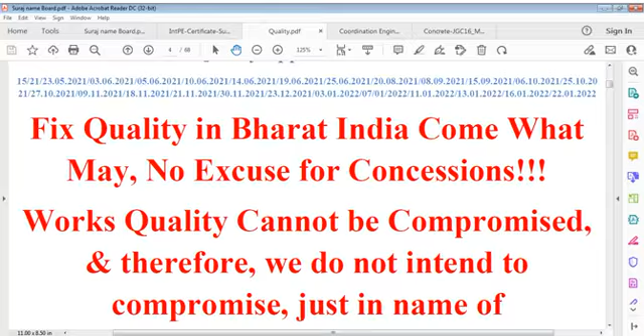For our country, Bharat, India, we have to agree and establish, and we should not believe in any concession. We have to think, do, and produce works. Quality cannot be compromised. If we compromise quality at all times, then we compromise engineering, because my product as a civil engineer has to live for 50 to 100 or 150 years, and products of other engineers cannot stay that long.

No machine can stay for more than 5 years perfectly, you can say 5 years, 10 years. No electronic gadget can work perfectly for more than 1, 2, or 3 years. You buy any electronic item, it shall not work perfectly after a couple of months or a couple of years, and that's the difference.

If you compare construction or civil engineering with other branches of engineering, we have to be very serious because we give a product for a whole life, a lifelong product, not just one lifetime but generations. You use this product, your son or daughter shall use it, and their sons or grandsons may use that project. That's why quality is very important from a construction or civil engineering viewpoint.

Not only in our country, but everywhere, though in our country it's most important because we generally use natural materials. In other countries I've seen adobe houses, wooden houses, plywood houses, or structural steel houses built on RCC foundations. Yet in our country we use RCC buildings, often combined with brick buildings, and that's very important where long-term effect is considered.

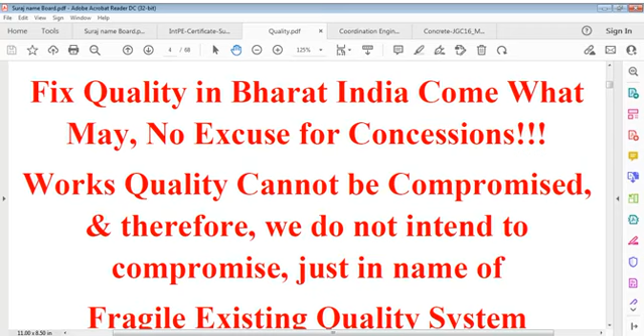Everybody decides that, but is that enough? If you say my company has been working in compliance with this system, is that enough? But you are not having any strict control on quality. If you don't have strict control on quality testing, checking, measurement and controls, you cannot say you are doing the right work. Okay, you satisfy the system, but you are not satisfying requirements.

That requirement is important. Compliance doesn't matter if quality is not achieved - I don't accept this fact. A quality system doesn't mean anything if your product doesn't conform to requirements or doesn't perform to intended quality. So quality should continue even if there exists no system. System may fail, but quality control must work. But it doesn't happen currently, to my experience.

Maybe your experience is different, maybe you don't want to realize this fact, but this is a fact. Take construction engineering, electronics engineering, mechanical engineering, whatever product available in the market - you shall be confused about this issue, that every product has some defect.

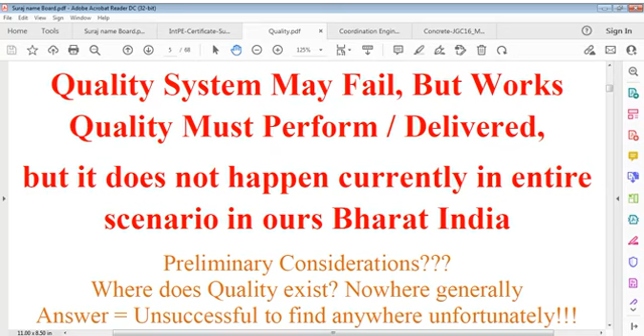Packaging is very good, talks are very good, every customer care unit talks very well - your call is very important for us. There can be questions on this. Only these fashionable designs of conversation have been made, but quality is not cared for. That's my real concern and preliminary consideration: where does quality exist? Nowhere - generally the answer is unsuccessful to find existence of quality anywhere, and that is unfortunate.

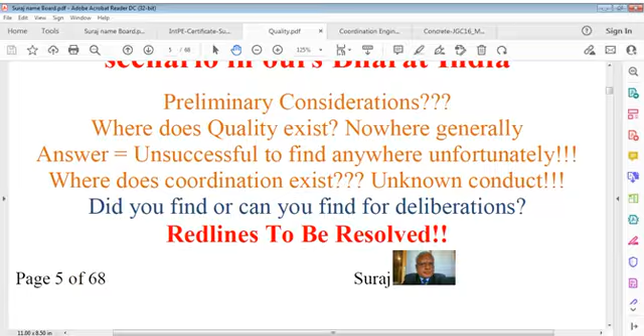Where does coordination exist? My answer is unknown - I cannot find it. Did you find it, or can you find it for deliberation? If you find it, let me know, we will discuss that. This red line we have to resolve. Can we bring the working environment to quality and coordination requirements? We have to get this point into our clarification.

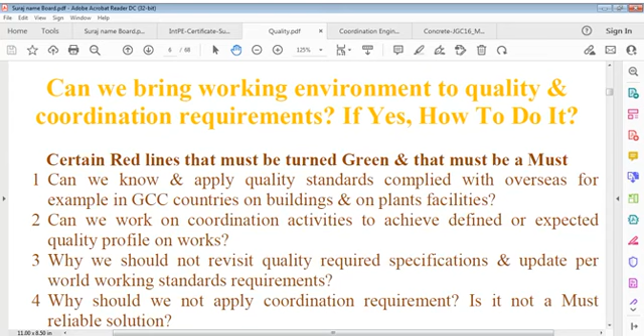Suppose I want to pour concrete but don't have information on what temperature I have to maintain, and I don't care for that. I don't try to find that information because I don't know how to coordinate. Who has time for this? Okay, fine, the weather is good, do it - and that point is done.

We don't care what's minimum, what's maximum temperature, what's curing temperature, what's concrete temperature, hardened concrete temperature, and what's temperature inside a block of concrete versus outside, what is the thermal gradient from time to time. All these points, part of technical and engineering coordination, are missed. We say okay, it's very solid, but maybe there are minor cracks we don't care for, but it should be careful.

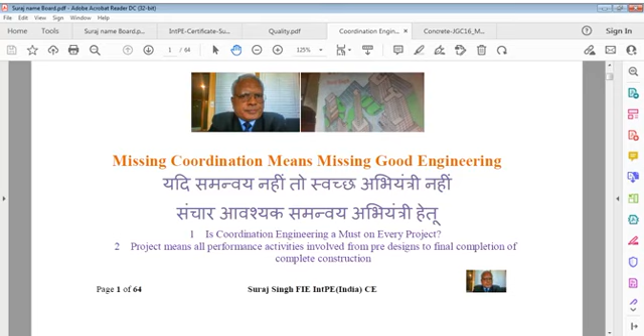Everything is not so easy as we think. We have to think from every angle, from every aspect - and that aspect is what we call communication support for reliability.

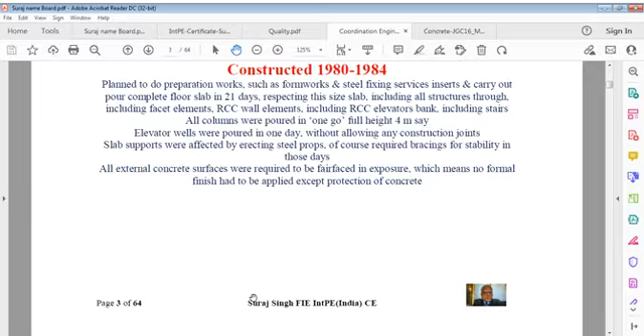Projects are not all the time such that you can say everything is fine, we have done it. We may say we have done it, but we did not do it, and that's the point where it's important.

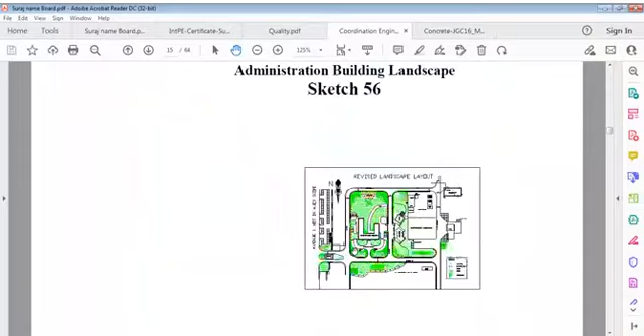I'm just going through my notes given on this card. That's why coordination engineering is a must on every project, and that is the point I refer to every time. This time also I want to spend some time on this coordination.

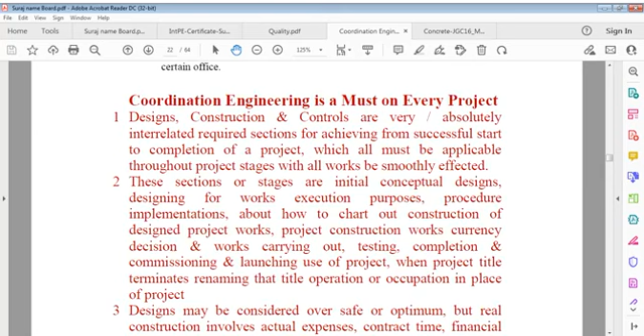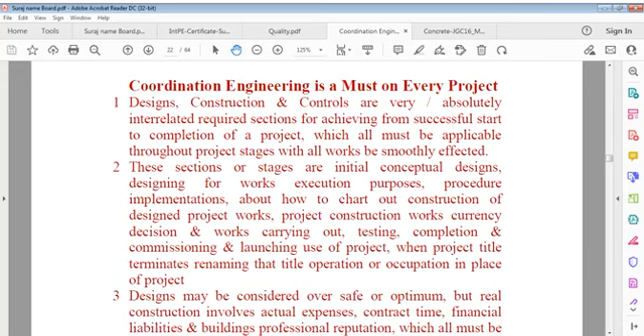Designs, constructions and controls are absolutely interrelated. Designs means what to construct, and construct means what controls we have on that, for achieving successful completion of a project, which must be applicable throughout project stages so all works are smoothly effected. These stages are initial conceptual design, designing for works execution, procedure implementation, how to chart out construction of designed project works, project construction works, currency decision and works carrying out, testing, completion and commissioning and launching use of the project.

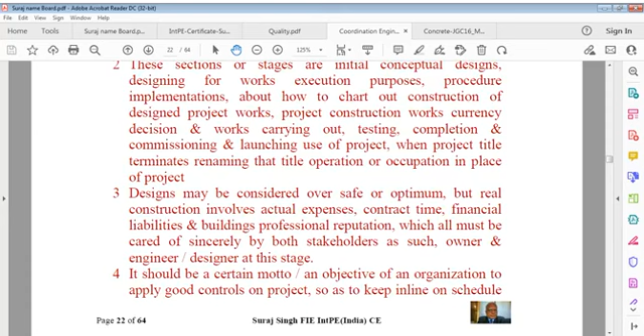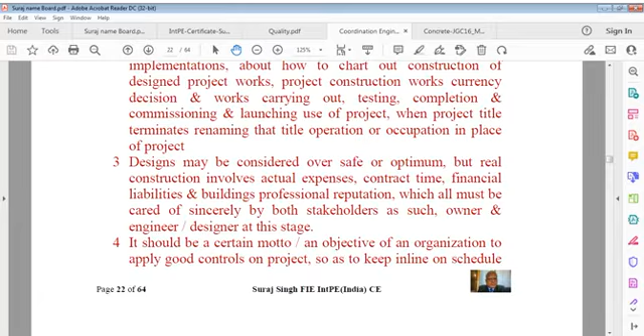When the project title terminates, renaming that title to operation or occupation of the project place. Designs may be considered oversafe or optimal, but real construction involves actual expenses, contract time, financial liabilities, and the building professional's reputation, which must all be cared for sincerely by both stakeholders, owner and engineer, at the time of design.

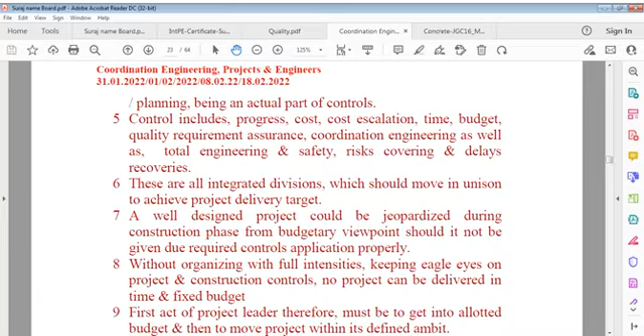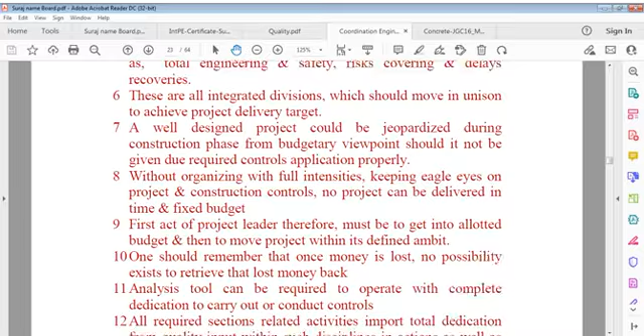A well-designed project could be jeopardized during construction itself, from a budgetary viewpoint, should it not be given due required controls application properly. Without organizing with full intensity, keeping eagle eyes on project and construction controls, no project can be delivered in time and fixed budget.

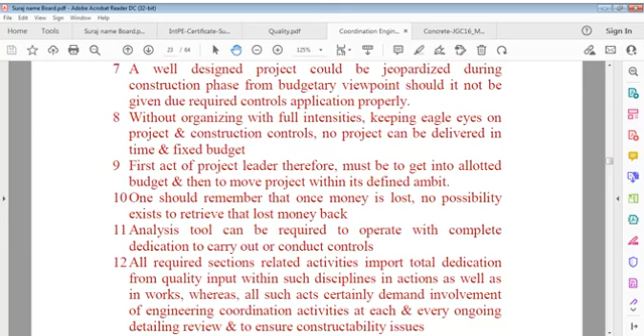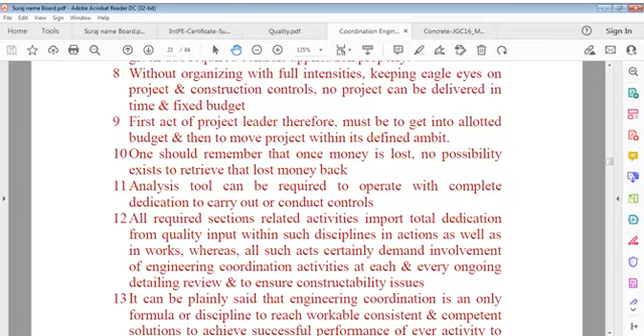The first act of a project leader therefore should be and must be to get into the allotted budget and then to move the project within its defined ambit. One should remember that once money is lost, it cannot come back. No possibility exists to retrieve that lost money.

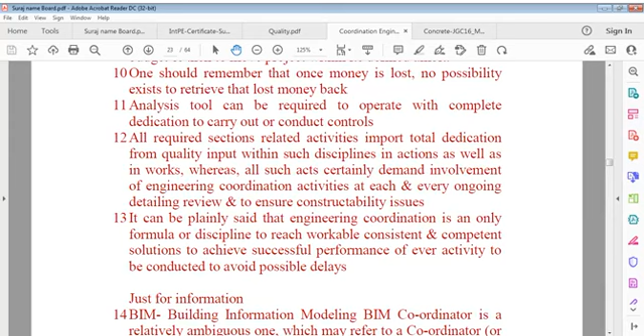Analysis tools are required to operate with complete dedication to carry out or conduct controls. All required sections related to activities import total dedication from quality input within such disciplines, in actions as well as in works. Whereas all such acts certainly demand involvement of engineering coordination activities at each and every ongoing detailing review, to ensure constructability issues.

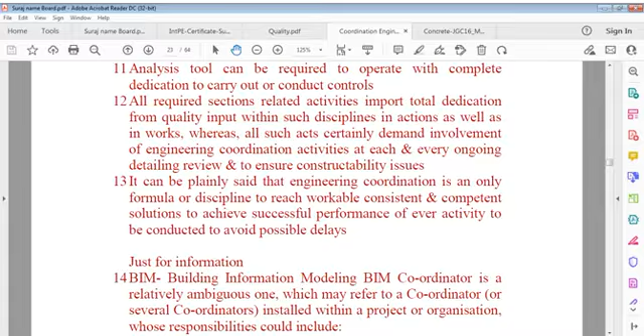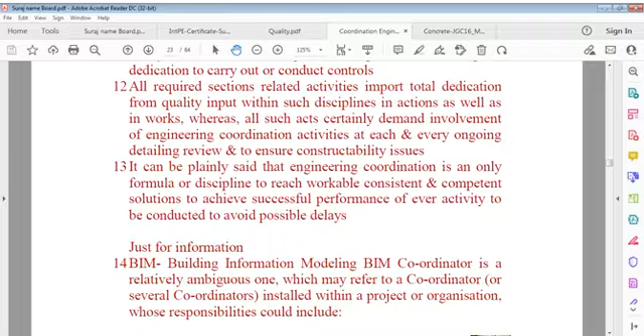It can be plainly said that engineering coordination is the only formula or discipline to reach workable, consistent and competent solutions, to achieve successful performance of every activity to be conducted, and to avoid possible delays. My point of view is we have to always keep in mind that activity in construction engineering,

whatever we do shall become a product for many, many decades to come. Do not think that it's going to be used for a couple of years like other equipment. Your building, your structure is equipment to be used for many, many decades to come.

Just think that it's also equipment, because we equip many materials there - sand is equipped, sand, aggregate, fine, coarse, cement or cementing materials, or whatever else we use there - it is produced for many decades. It shall serve for many, many decades, just like rocks serve this earth for many decades.

Earth itself has been there since times we do not know. In the same way, today we produce some structure and it can work for many hundred years. Nobody knows - that's the point we say.

So it will exhibit signs of distress but continue, and there can be crashes also. So those considerations must be taken care of, and that point is very, very important, and every engineer is supposed to think of that.

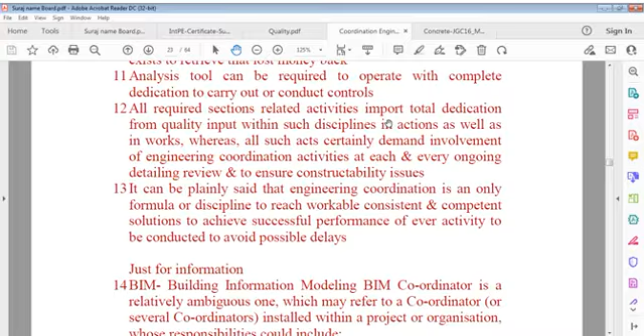Construction engineering is not like other engineering. It's different because it involves life, our lives. We cannot risk our lives just by doing good or bad work - bad work, substandard work, or negligent activity-based work, doesn't mean anything in construction. So we have to keep this point in mind and understand what we are saying.

Last time we were talking about this file, and this time also we are serious about this file. It is the Japanese specification. Yesterday we were somewhere on page 65. Correct.

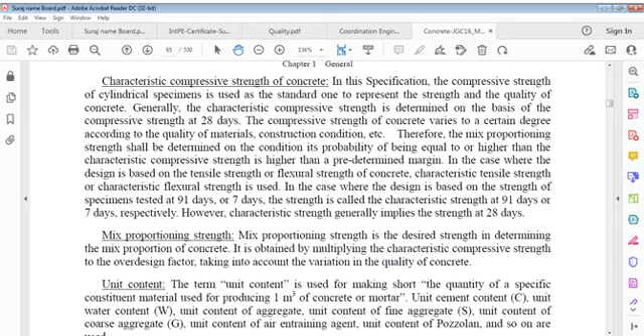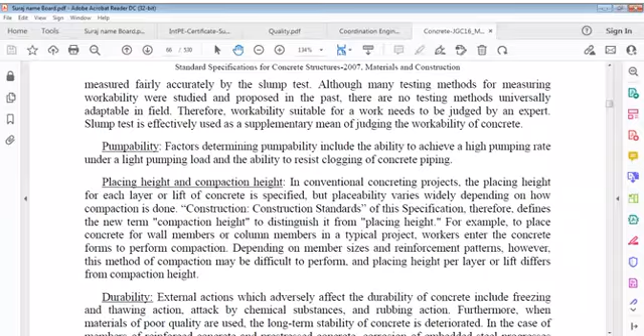In this diagram we discussed the powdery material, Portland cement, and also slump test, consistency and workability. Pumpability, what is pumpability? Placing height and compaction height. We discussed durability. Yes, durability we can stop here.

Let's start from here itself. Durability in itself is a very important point. It's very important in civil engineering. We have to take care of this. Whatever product, whatever work we have to do, we have to keep in mind durability of that product, because durability means long distance travel in safe mode. You got my point. Durability means...

External actions, according to this book, which adversely affect the durability of concrete include freezing and thawing actions. For concrete, there's a freezing act, and then there is a melting or thawing act. This impacts durability properties of concrete, due to attacks by chemical substances and rubbing action. Furthermore, when materials of poor quality are used, long-term stability of concrete is deteriorated. In case of reinforced concrete and pre-stressed concrete members, corrosion of embedded steel progresses and durability is damaged. If concrete is neutralized or chloride accumulates beyond a certain limit in members, then durability is attacked, impacted, or challenged.

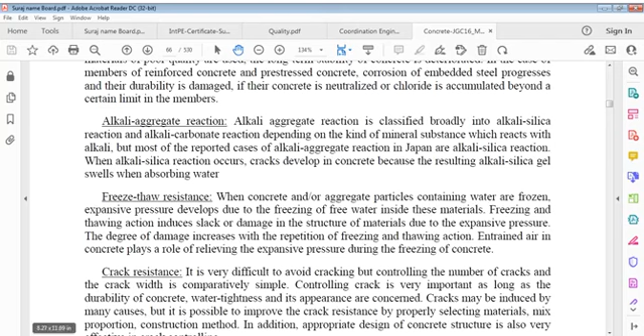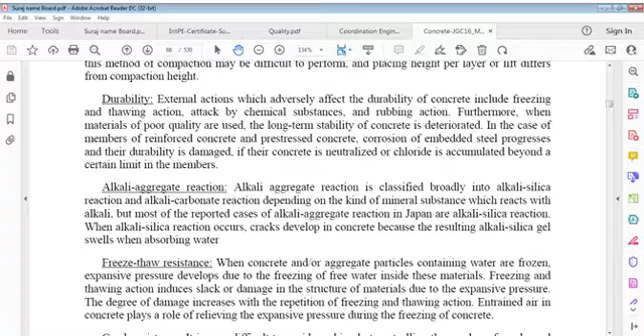So what we have to say, this is a very small definition given, I'm not happy with that. There's really more, because strength is an issue, deflection is also an issue, overstress is an issue, cracking is an issue, heat is an issue. There are so many issues, valves, whatever it is. We can add on to that: alkali aggregate reaction, freeze thaw resistance, and crack resistance.

Let's see what it says. Alkali aggregate reaction is classified broadly into alkali silica reaction and alkali carbonate reaction, depending on the kind of minerals or substance which reacts with alkali. Most of the reported cases of alkali aggregate reaction in Japan are alkali silica reaction. When alkali silica reaction occurs, cracks develop in concrete.

Alkali silica reaction - you know what is silica? It's a kind of sand. So alkali silica reaction occurs, cracks develop in concrete because the resulting alkali silica gel swells when it absorbs water.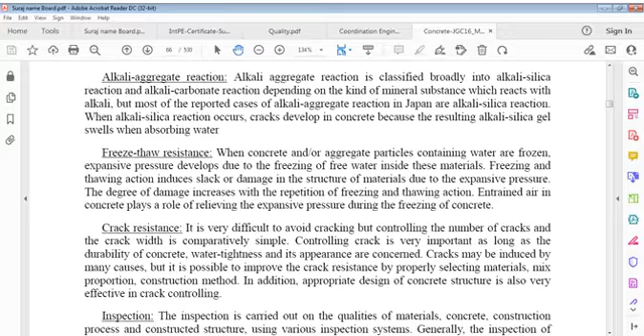Freeze thaw resistance - you know what is freezing, when snow falls, freezes, and then evaporates or thaws, when concrete and/or aggregate particles containing water are frozen. Expansive pressure develops after freezing, due to freezing of free water inside these materials. Freezing and thawing action induces slack or damage in the structure of materials due to expansive pressure.

Degree of damage increases with repetition of freezing and thawing actions. Entrained air in concrete plays a role of relieving expansive pressure during freezing of concrete. So that is entrained air - it plays a role of relieving expansive pressure during freezing of concrete.

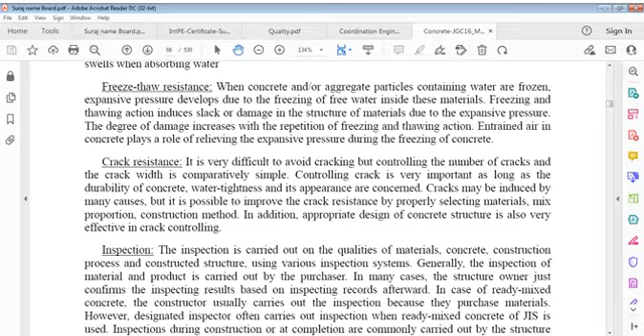It's very common sense. Crack resistance - it is very difficult to avoid cracking, but controlling the number of cracks and crack width is comparatively simple. Controlling cracks is very important as long...

as durability of concrete, water tightness, and its appearance are concerned. Cracks may be induced by many causes, but it's possible to improve crack resistance by properly selecting materials, mix proportion, and construction method. In addition, appropriate design of the concrete structure is also very effective in crack controlling.

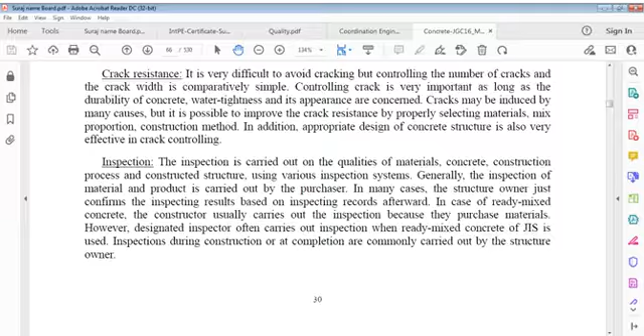Inspection is carried out on qualities of materials, concrete construction process, and constructed structure, using various inspection systems.

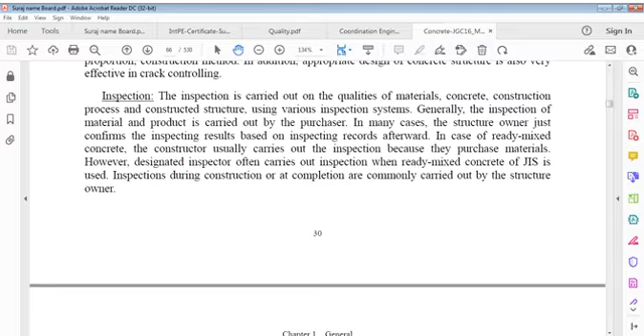Generally, inspection of material and product is carried out by the purchaser. In many cases, a structure owner just confirms inspecting results based on inspecting records. Afterwards, in case of ready-mix concrete, the constructor usually carries out inspection because they purchase materials. However, a designated inspector often carries out inspection when ready-mix concrete is used. Inspections during construction or at completion are commonly carried out by the structure owner.

Now we talk of something technical - moist curing, to ensure the necessary amount of water for hydration of cement in concrete, since it's not sufficient just by preventing evaporation of water from placed concrete. Curing method is also effective in preventing cracking due to drying shrinkage during the initial hardening stage.

Temperature controlled curing: this method controls temperature in each part of concrete to facilitate normal hardening process and to avoid cracking after hardening, as well as development of excessive internal stress. In utilizing this curing method, it is necessary to take into account both the size of members and the effect of construction conditions.

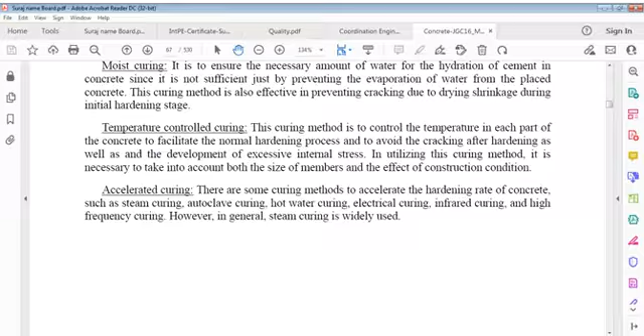Accelerated curing: some curing methods accelerate the hardening rate of concrete, such as steam curing, autoclave curing, hot water curing, electrical curing, infrared curing, and high frequency curing. However, in general, steam curing is widely used.

Quality of concrete.

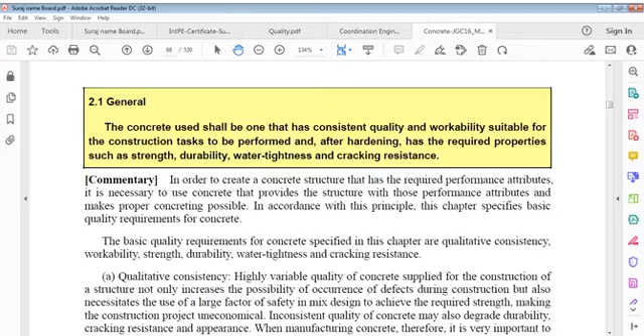Concrete used shall be one that has consistent quality and workability, suitable for construction tasks to be performed, and after hardening has required properties such as strength, durability, water tightness, and cracking resistance.

Durability, strength of course must be considered: how durable it is, what's its water tightness status, and its cracking resistance.

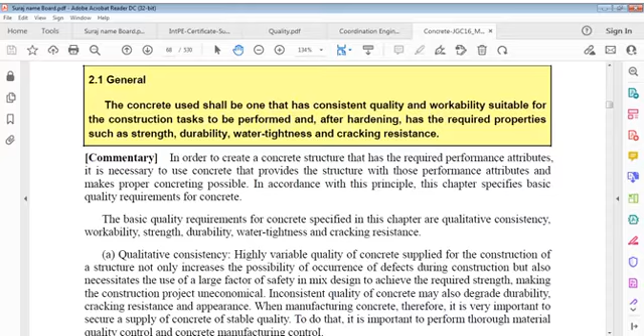In order to create a concrete structure that has required performance attributes, it's necessary to use concrete that provides the structure with those performance attributes and makes proper concreting possible. In accordance with this principle, this chapter specifies basic quality requirements for concrete.

Basic quality requirements for concrete specified in this chapter are qualitative consistency, workability, strength, durability, water tightness, and cracking resistance. Qualitative consistency means what level of quality, how can you justify quality consistency; then workability, how to work upon this concrete supplied or mixed; then its strength, how much strength does this concrete achieve; and then durability, water tightness, and cracking resistance.

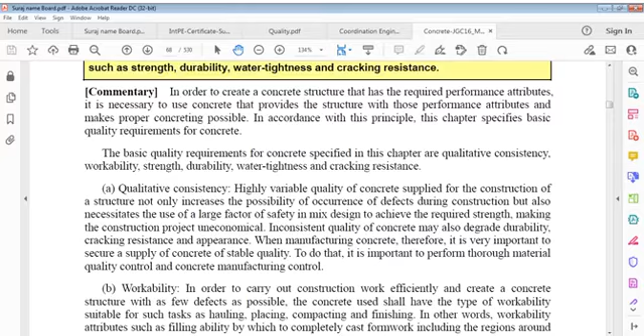Qualitative consistency means highly variable quality of concrete supplied for construction of a structure. This not only increases the possibility of occurrence of defects during construction, but also necessitates use of a large factor of safety in mix design to achieve required strength, making the construction project uneconomical.

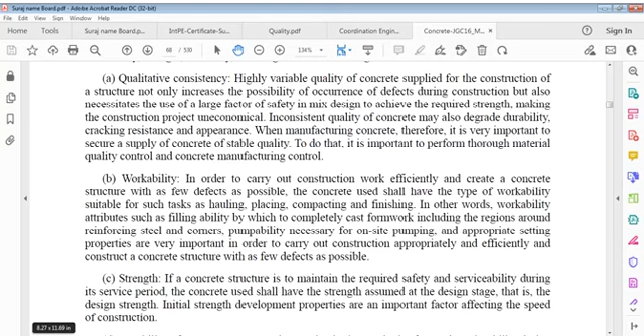Inconsistent quality of concrete may also degrade durability, cracking resistance, and appearance. When manufacturing concrete, therefore, it's very important to secure a supply of concrete of stable quality. To do that, it's important to perform thorough material quality control and concrete manufacturing control.

Workability. We do work of concrete, meaning we have to deal with concrete; we should have a comfortable position in doing that, ease of doing you can say. Workability is, in order to carry out construction work efficiently and create a concrete structure with as few defects as possible, concrete used shall have the type of workability suitable for such tasks as hauling, which is first, then placing, compacting, and finishing.

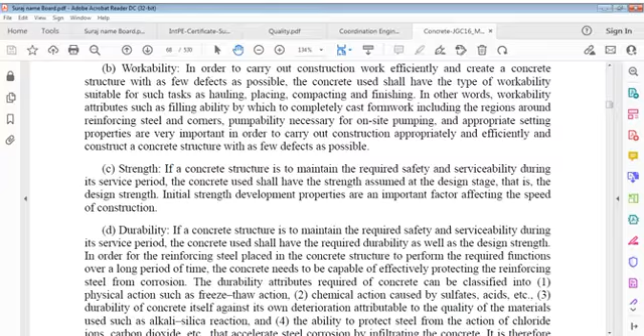In other words, workability attributes such as filling or pouring ability, by which to completely cast formwork including regions around reinforcing steel and corners, pumpability necessary for on-site pumping, and appropriate setting properties are very important in order to carry out construction appropriately and efficiently, and construct a concrete structure with as few defects as possible.

Strength. If a concrete structure is to maintain required strength, safety, and serviceability during its service period, concrete used shall have strength assumed in the design, that is design strength. Initial strength development is an important factor affecting speed of construction.

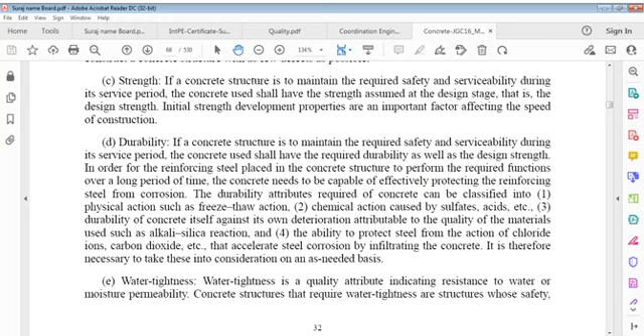Now durability. If a concrete structure is to maintain required safety and serviceability during its service period, concrete used shall have required durability as well as design strength. In order for reinforcing steel placed in a concrete structure to perform required functions over a long period of time, concrete needs to be capable of effectively protecting reinforcing steel from corrosion.

Durability attributes required for concrete can be classified into physical action such as freeze-thaw action, chemical action caused by sulfates, acids, etc., durability of concrete itself against its own deterioration attributable to quality of materials used such as alkali-silica reaction, and ability to protect steel from action of chloride ions, carbon dioxide, etc. that accelerates steel corrosion by infiltrating concrete. It is therefore necessary to take these into consideration on an as-required basis.

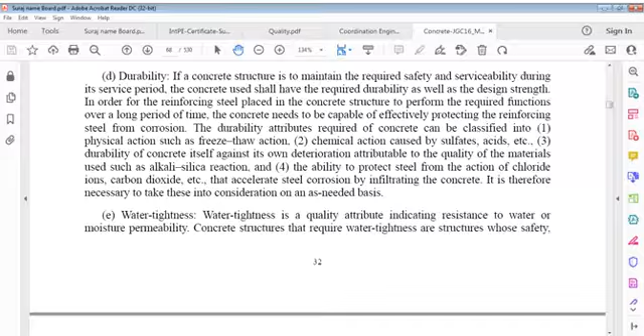Water tightness is a quality attribute indicating resistance to water or moisture permeability.

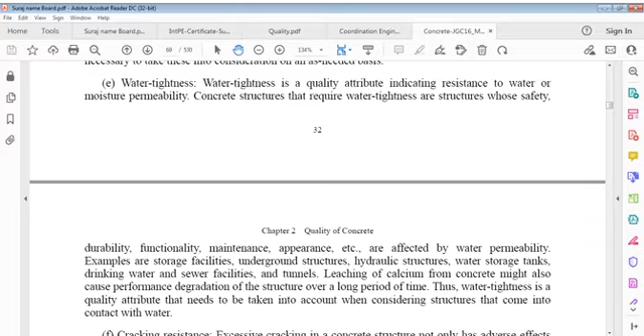Concrete structures that require water tightness are structures whose safety, durability, functionality, maintenance, appearance, etc. are affected by water permeability. Examples are storage facilities, underground structures, hydraulic structures, water storage tanks, drinking water and sewer facilities, and tunnels.

Leaching of calcium from concrete might also cause performance degradation of structures, even over a long period of time. Thus, water tightness is a quality attribute that needs to be taken into account when considering structures that come in contact with water.

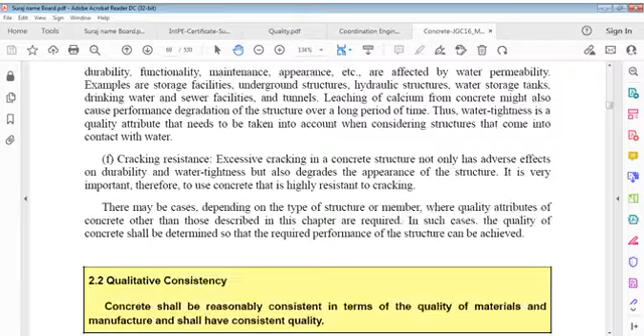Cracking resistance. Excessive cracking in a concrete structure not only has adverse effects on durability and water tightness but also degrades the appearance of the structure. It's very important, therefore, to use concrete that is highly resistant to cracking.

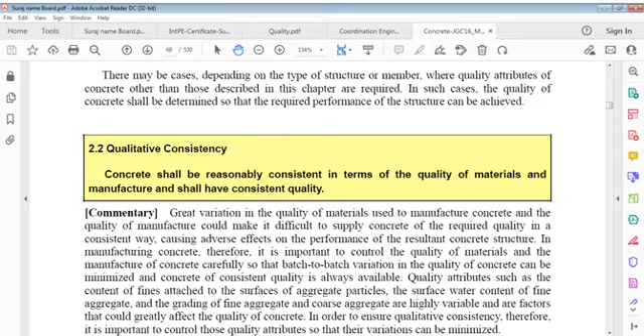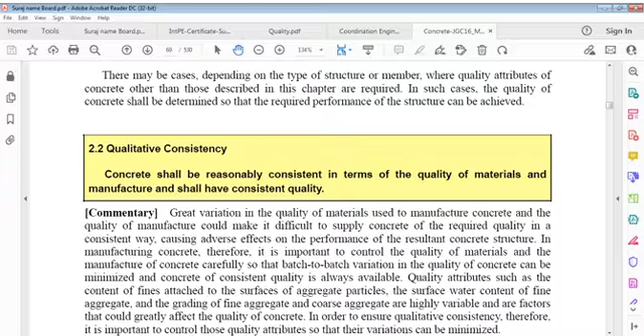There may be cases, depending on the type of structure or member, where quality attributes of concrete other than those described in this chapter are required. In such cases, the quality of concrete shall be determined so that required performance of the structure can be achieved. Now, qualitative consistency...